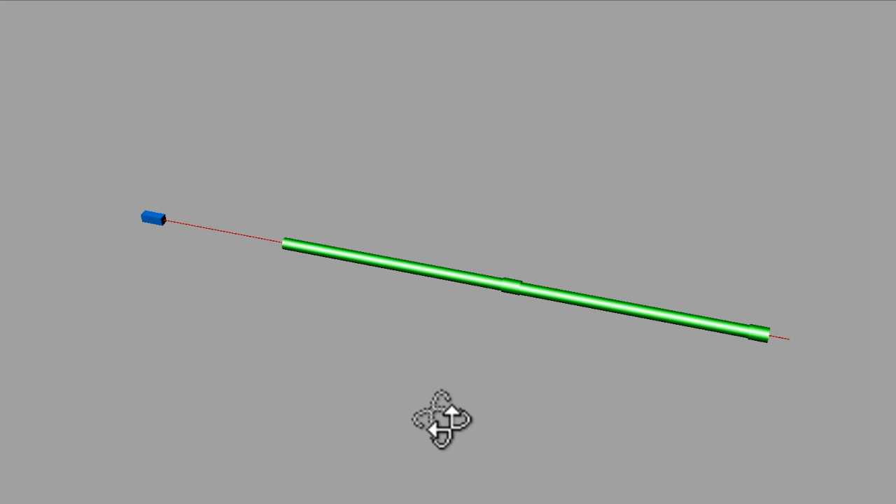Hello, my name is Philip Paul with World Construction Solutions, and we're working on a patent right now, building machines that lay curved sewers.

This drawing right here is to show you that normal sewers are laid straight because they're laid with this laser beam. They're laid with a laser beam because of the accuracy needed, since you have to fall for up to miles.

You can only lay about 400 foot at a time with a laser beam because of the curvature of the earth and the weather conditions inside the pipe. A lot of times you get blow air and things because of condensation and temperature differences, which makes the laser beam move, bounce, and curve.

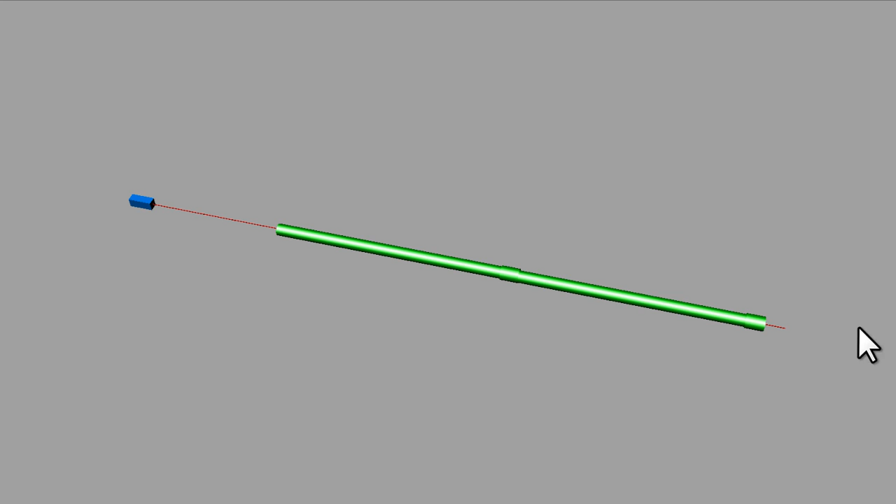It's kind of a weird thing to see. You have a very powerful laser, battery packs and everything to last all day while you're shooting through the long distance.

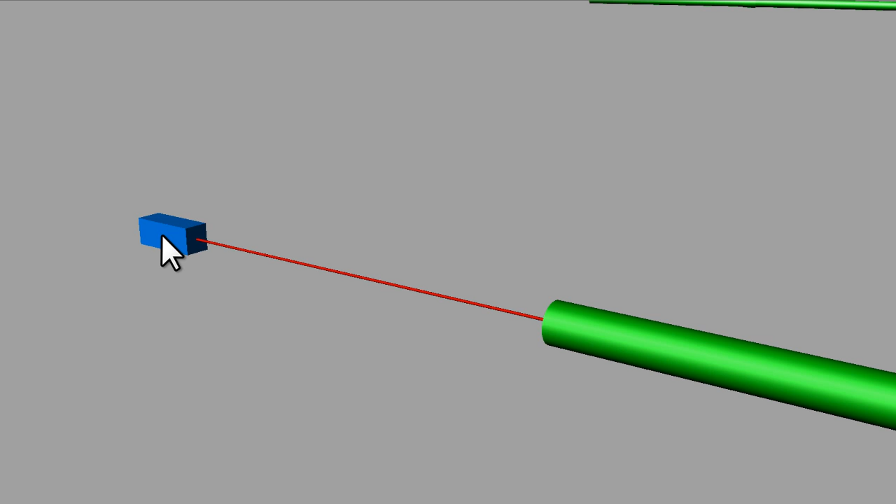Installers set up a laser. This is representing the laser right here, red or green beam or whatever color you want coming out of it. You type in your slope for the fall in your pipe, maybe 0.03% slope. You shoot that out. Maybe this is a manhole here, just the end of a big pipe.

You shoot the beam through the pipe. As you go through, your installer sets a target, such as this, with a plexiglass colored screen, bullseye, and this is your laser beam representing coming through that. It sits inside the bell, and that way you can move it up and down whatever way it's got to go to get the pipe online centered to lay the pipe.

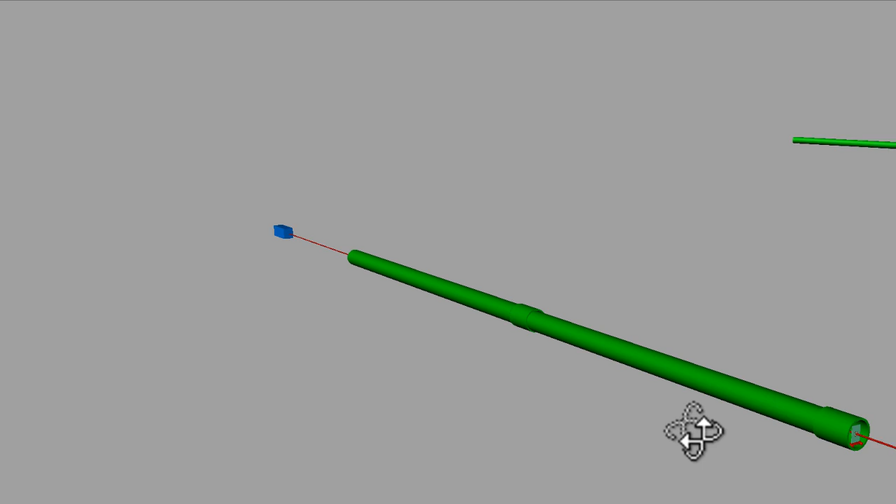The problem with the old system is that it's a great system, but it has one major drawback: you can only lay sewers straight, only up to about 400 feet at a time.

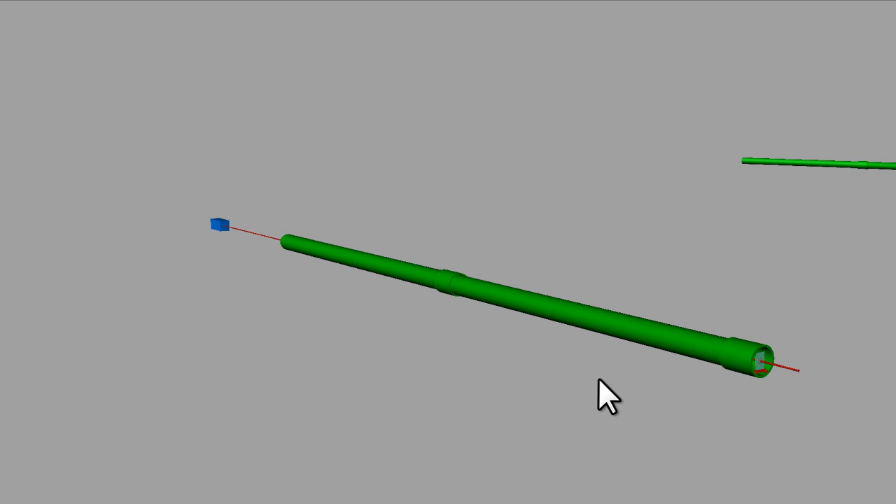This model right here is 2 GPS antennas. Let me zoom in here a little bit more. In line with each other.

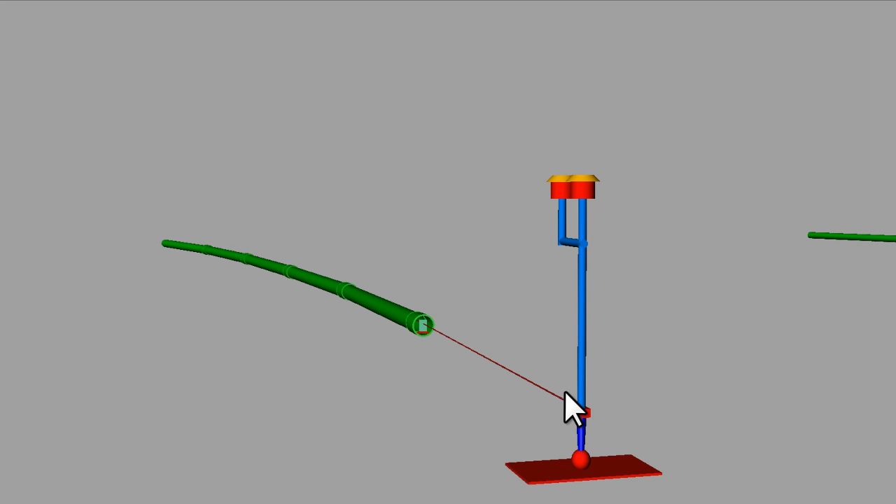On a pole, so this is 4 foot from here to the laser beam, laser mounted. These 2 antennas, let me zoom in here a little bit, are on a hand stick, in this case, this first prototype, with this receiver and this receiver being perfectly straight with each other, perfectly same altitude.

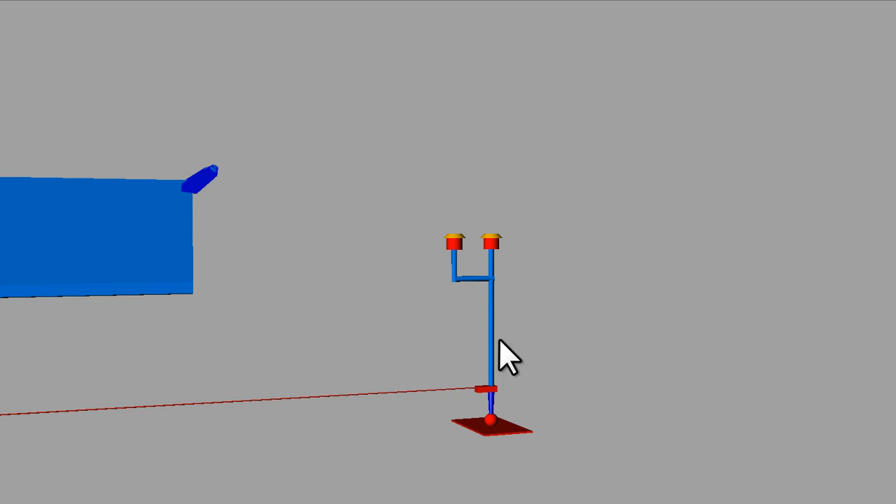On this bar, if we go down, say 4 foot, and mount a laser at the same straightness as the antennas, we should be able to move the antennas into position, calculate 4 foot below them, and that'll be the laser beam. So they can follow a line, per se, in space.

That line now can be curved, because we're not aiming through the pipe, we're aiming back at the pipe, at the target.

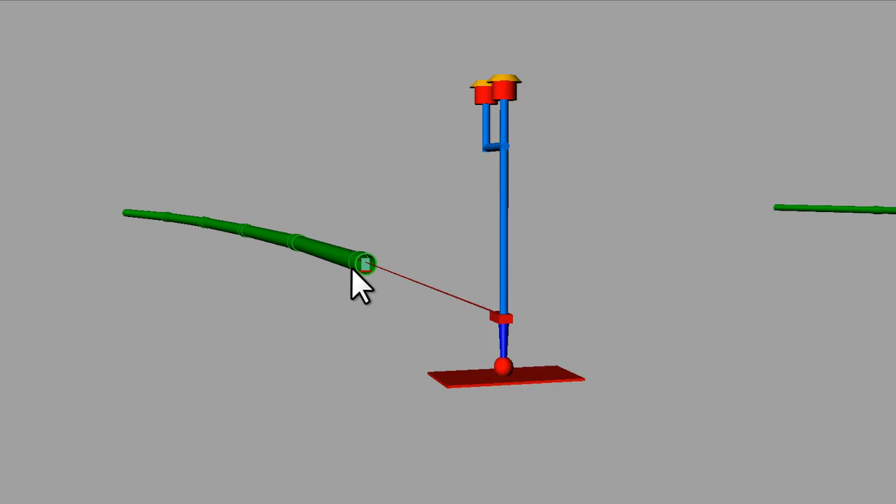So the installer uses the same target, still sets it in the ground, still puts the bell in there, moves it around. He can still take his shovel or a grade stick and break the beam with it to see what grade is.

The nice thing though is the operator that's digging for this pipe can now see the laser beam inside his bucket or in the dirt as he's digging, or as dust comes up. He can see and get an idea where grade is himself.

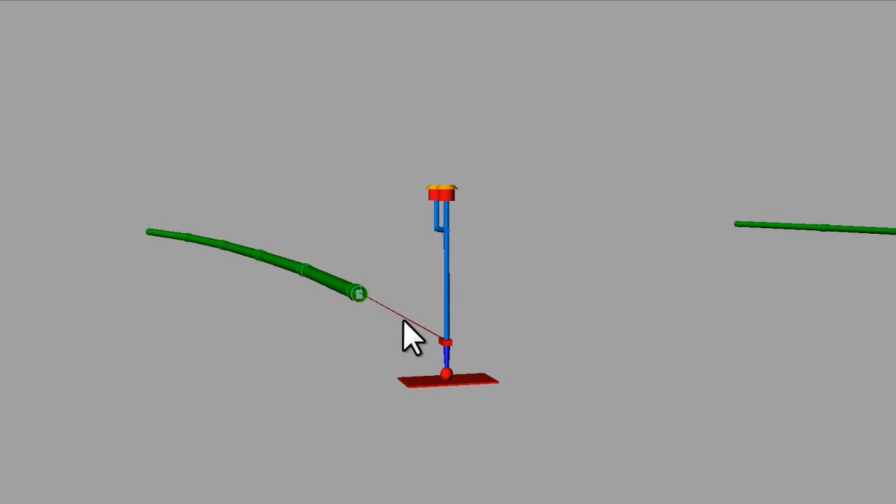In the old days, or now, soon to be the old days I believe, with the laser beam going through the pipe, the operator could never see the end of the beam because it would be on the backside of his bucket. So that was no help from his eyes, just whatever the laborer and installer told him.

This is a very simple way to do it. This is all hand adjusted for prototype number 1, for use outside of any kind of pipes, ditches, anything you want.

But as the GPS tells the end of this laser where on this curve that's drawn on a set of blueprints that's been installed, each time you move this device, it'll make you come to that point, and then it'll make you aim back to the last section, so the beam will go back.

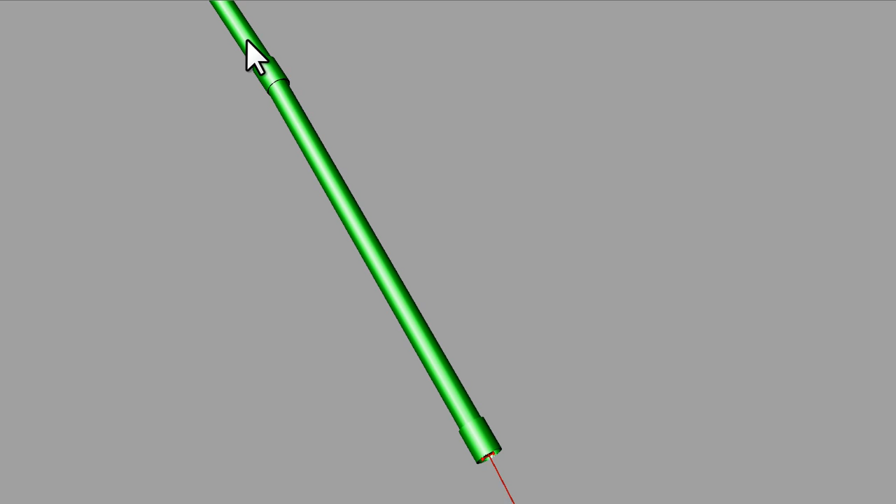So this is a straight line here. The pipe is bent at the joints. I don't know whether you can see this here, let me zoom in, but see how the pipe, you can bend pipe up to, I think, about 10%.

This depends on what kind of pipe and how big it is. Or you can use sewer pipe bends, or bend the sewer pipe. They have benders and all kinds of things for plastic pipe, or you can use fittings or manholes in that case if you want to, or clean outs, whatever you want to use.

So that being prototype number one, that gives us a way to do it, the most cheapest way we can do it. Not always the best thing down in the ground real deep. This would have to be very tall.

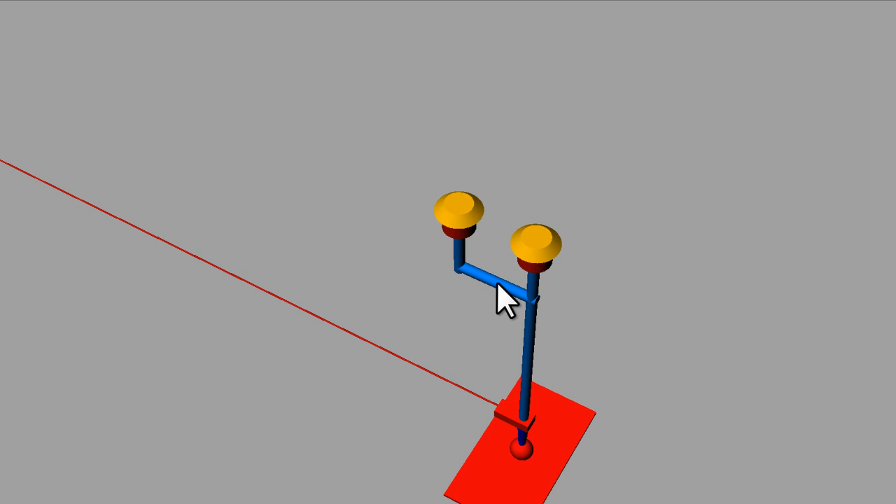So we go to the box where we're laying sewer mains. Let me get down here where I can zoom in on this thing. Find a small point here. And here we go, zoom. Of course, it takes forever when you're on video.

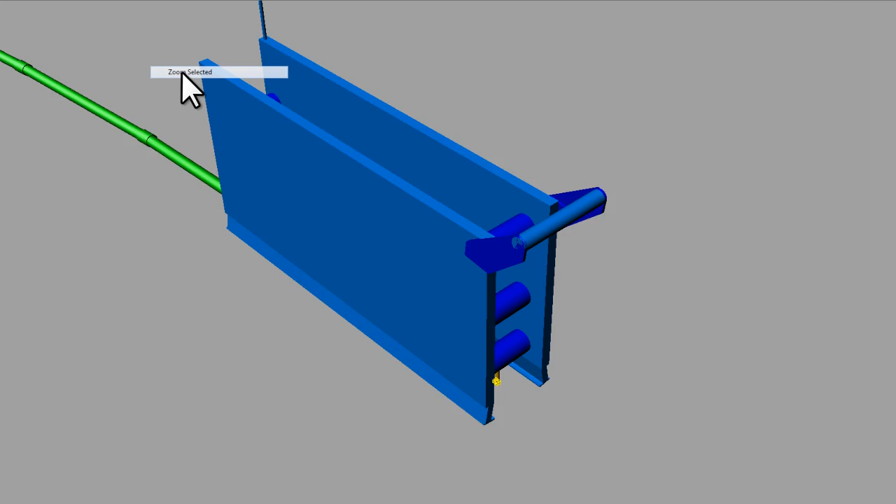Zoom Selected, okay. Now, so what we did in this case is we have a trench box which keeps the men safe in the ground for installers. We mount the dual antenna GPS receivers, computers and their own batteries, on the box.

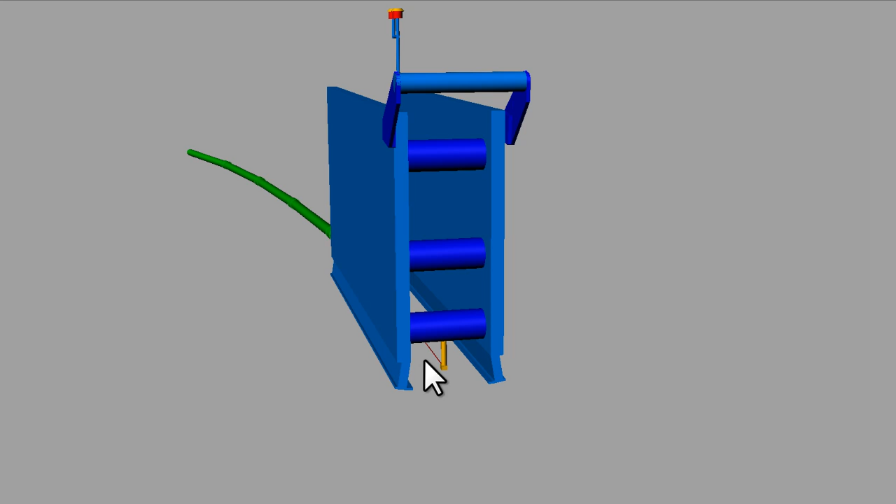This is already predetermined inside the computer of how big the box is and what it takes to get to this point of the poly line, or the line that is inputted into the system that the laser is going to follow.

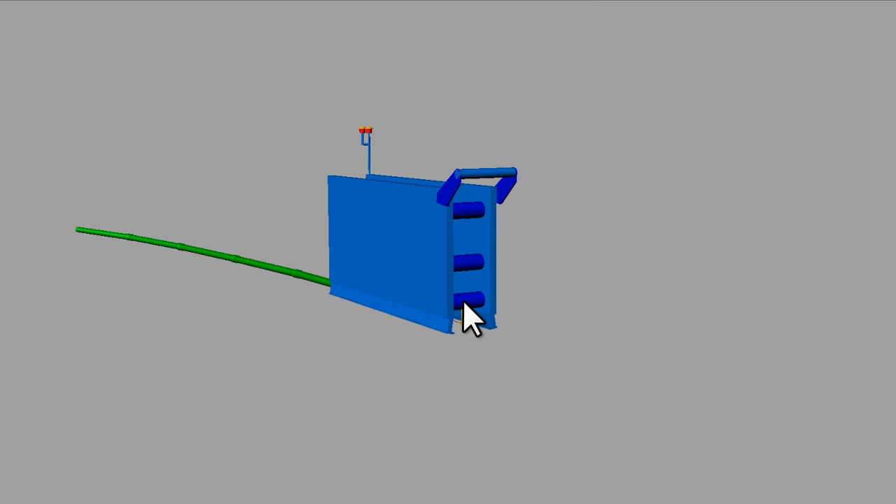If you can imagine being down on the ground, this would be out of the way of the machine digging, reaching down here. This is the pull bar that the machine pulls the box through the ground, the shield, they call it, to protect the men, or installers, I should say.

But this right here unit would be basically inside the wall of the unit so that it's safe while it's being dug and dragged. Once it's dragged, then the installer and or the operator will both have some kind of a key fob.

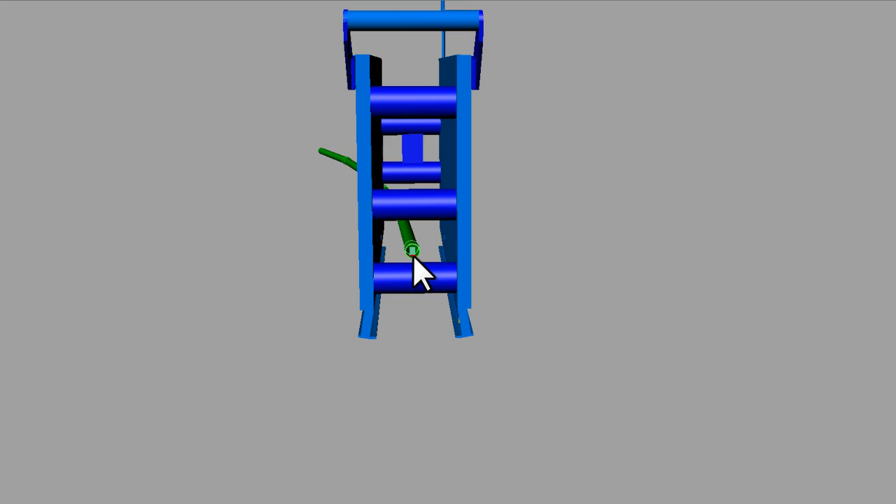I should say a remote control device, maybe on their belt loop, on their wristwatch, in their iPhone, I don't know. But when they hit that button, because they're getting ready to go down there, then all of a sudden this thing could come out. It could basically slide out of the wall, out of the protective area.

It can go up and down, whatever it's got to do to find that point of the laser beam. And you can see here is a line up and down, and we get right that on.

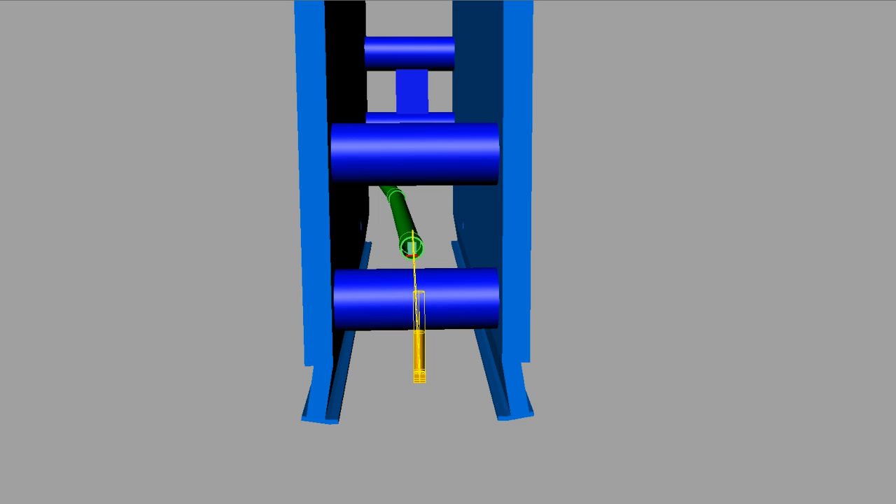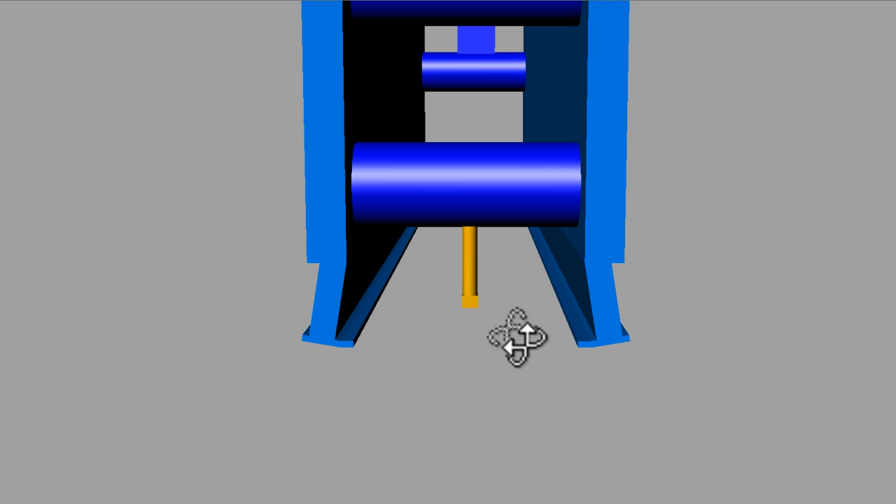That should shoot the last pipe in the ground for verification if you had your target in there. Well, now the installer can, it's got the laser beam just like before, puts the pipe in and lines it up with the laser beam, lays pipe, gravel, gets all done, says, hey, I'm all done now, and pushes his key fob, the laser thing goes up, over, and inside of a protective area.

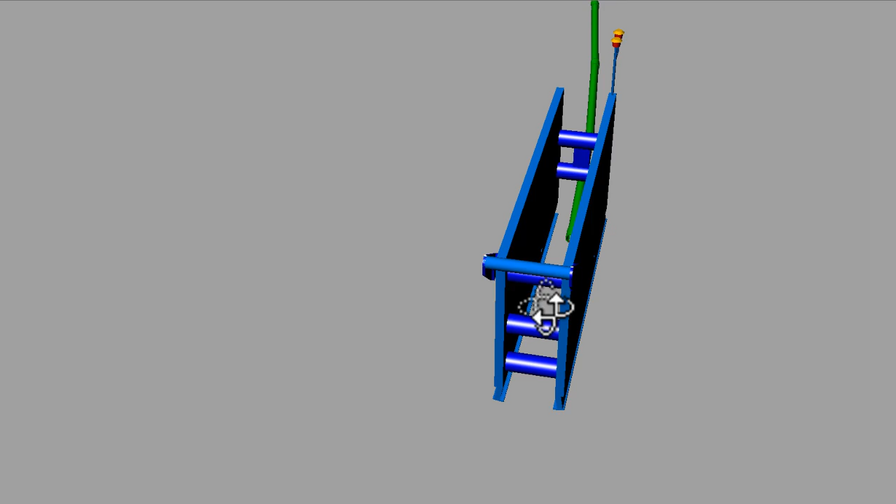So the reason for all that, and those two linear motors moving that laser beam, twisting and aiming light, is it knows in space where it's following that line. It's aiming back. It changes. Only thing it changes is a setup time for using the old laser shooting down through there.

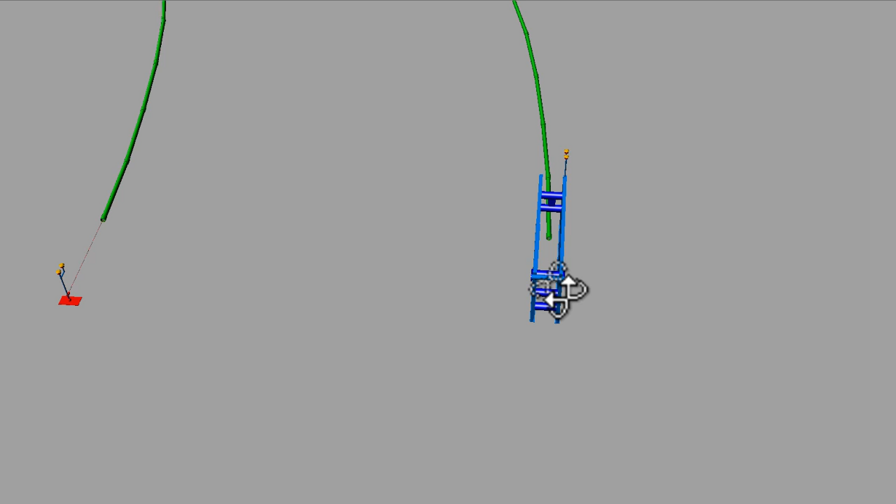It's basically installation is quicker, and it could be S-curved back and forth. The grades could raise up and down in areas if needed to. Maybe you come up to a hill and you want a certain amount of cover, and now you can draw on the blueprints to start making the rise a whole lot sooner.

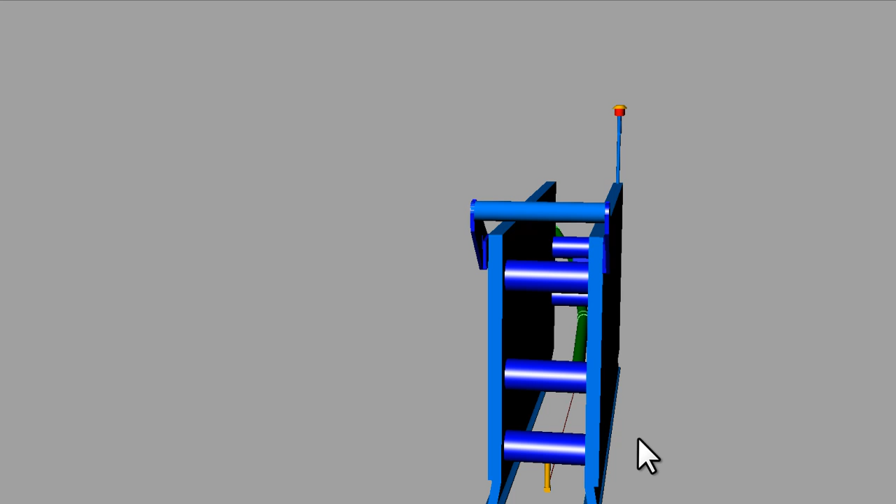That's the beauty of it, and it's going to make sewer laying much more efficient, buying less manholes, which is just a huge cost. You can jet out for over 1,000 feet, so you can put a clean out every couple thousand feet. Huge time savers, so bring the cost of the job down that way.

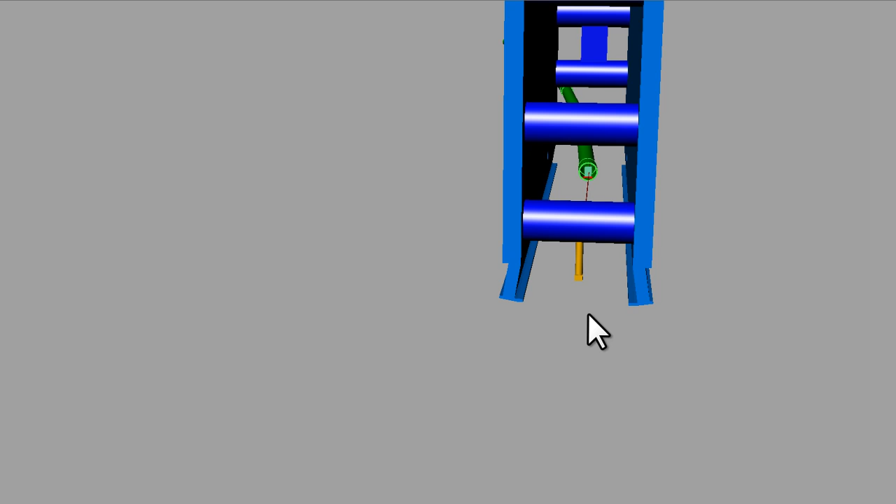Huge cost of material savings. No manholes made out of concrete anymore that the acids are eating up and getting rid of. And not buying massive amounts of easements. The easements costs are just crazy because you got to try to lay straight lines along a curved road or around things. It's just not hardly possible.

So, with the new technology, thank God we can start thinking different ways to do this stuff.